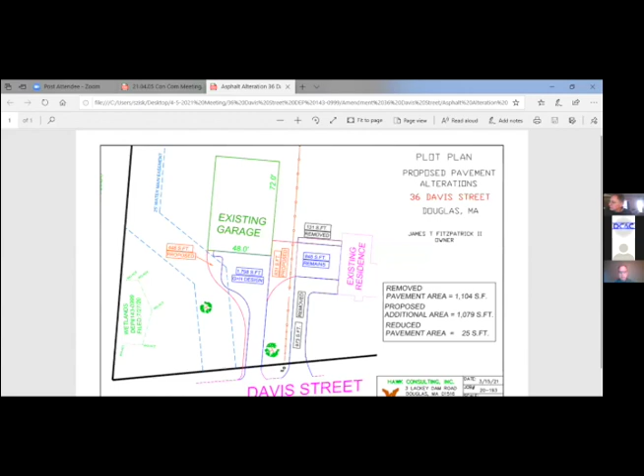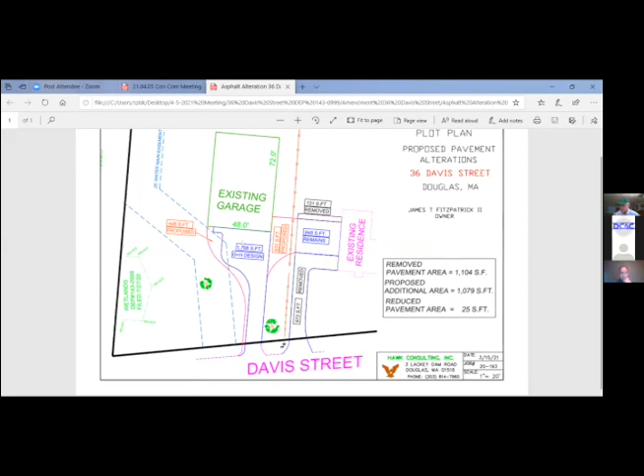Yes, so this is across, Mr. Fitzpatrick can kind of explain. I think if you go down Davis Street, the garage is up. I got some photos I'll show you. I think his existing house is to the right, and I think he wants to connect, he just wants to add a little paving between the two properties. Let me bring up some photos of it.

So this is the existing property here. Is the photos up on the screen? Yes. So Mr. Fitzpatrick, you kind of want to explain what you want to do here? Yeah, right where the white van is, where the tractor is, I'm looking to actually connect the driveway that was approved, that area right there, into the existing driveway to the right of that picture.

And then what I'm looking to do is I'm going to remove a good portion of the existing driveway on this, on the house side, and replace, I'm looking just to replace what I'm removing, just in a different location.

So where that white fence is, that driveway on the left, I'm going to remove that driveway. I was hoping to be able to incorporate all that, but I just installed that driveway like 2 years ago, and now I'm going to rip it up. But in the grand scheme of things, it makes everything flow so much nicer, and that's the reason why I'm asking for this. What's going to replace the driveway that you're ripping out?

Grass, I'm going to extend the lawn. Where you see that, where your pointer is, where the white fence is. Split rail fence? Yeah, yeah, that white fence is going to come out. The stone wall, currently in front of that stone wall all the way up, there's probably about a 2-foot patch of grass existing. So what I'm going to do is remove that driveway.

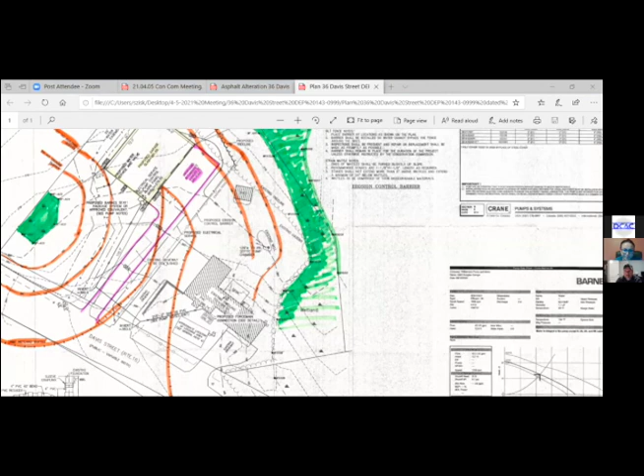Because the plan you're showing was the original plan I submitted—the building is not where you're showing it on that picture, that was the original submittal. Okay, so yeah, the majority is outside the jurisdiction as far as that little slice in there. I wasn't sure, that's why I wanted to make sure. Is this new plan coming up?

Yeah, that's the right plan. Yeah, that's correct, that is the current one. And yeah, you're correct—there's not very much that I'm adding that would fall into our jurisdiction.

And you're actually reducing the proposed on the left side, right? Proposed driveway on the right side is existing. Yeah, on the right, not the left. On the left side, you had proposed—yeah, that was the approved proposed—so you have a little bit over there that you're not doing.

That's correct. At the end of the day, I'm actually 25 square feet less by removing what I'm removing and adding where I'm adding to the approved plan in front of you. So you're not doing the proposed we already approved for 448 square feet, and your proposed 631 square feet is really not even in our jurisdictional area. Maybe probably an eighth is, I would say.

So, I mean, we're moving farther away from that isolated wetland on the front, a little bit farther, 448 square feet less. Right, okay.

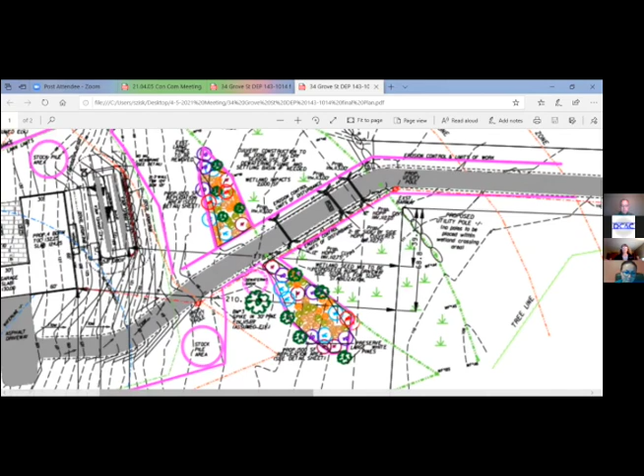Because I think initially they were gonna have like a dirt road or something, and I was concerned about that because in the summer the dirt and sand and stuff flying all over the place. And then Dale had mentioned that he'd just tar it. But then I was like, well what about drainage?

Sorry Steve, go ahead. I believe the entire driveway is designed to be asphalted. Yeah, I had asked that question a few weeks back, a few meetings ago.

And then you can also see how it's pitched with the flow. Yeah, I see the arrows towards the left side, but I don't see anything going down the driveway. Okay.

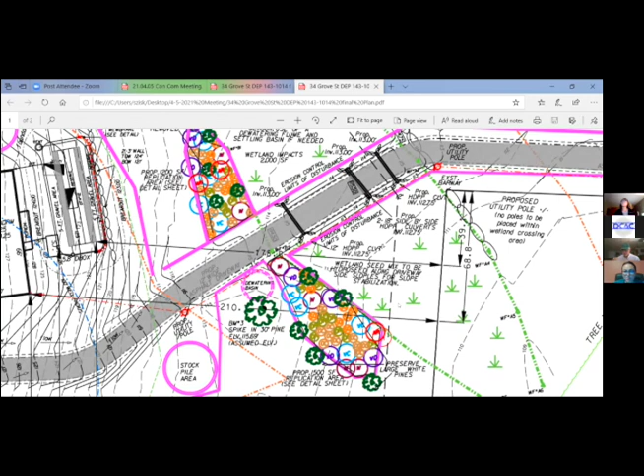Usually the driveway is crowned where it goes over the wetland area. So at the middle pipe, the middle culvert, that's the high point of the driveway, and it goes towards the house and towards the road from that point. Okay, alright, oh, because it's going to be down like a slant. Okay, yes, alright. Sorry, not an engineer.

Okay, we want to keep everyone happy. Well, I'll let it go as much as possible. Right.

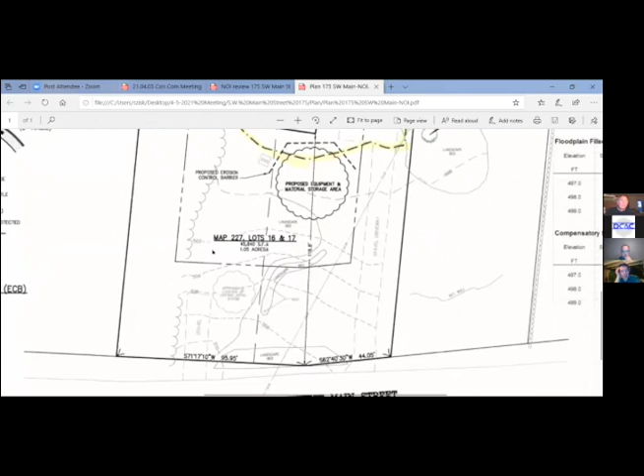Do you have another existing driveway also out there? Yeah, there's one on the left-hand side. I don't think it leads very far into the lot, it's kind of truncated, goes in maybe 40 or 50 feet. If I have a video, you can see it.

So the addition's going to the left. That's right. And that's where the garage would be, we're looking at the area where the garage is. Looks like you might have the second driveway that Steve was talking about, it comes all the way in. Yeah, it might have done some work there since our field survey last year.

This is pretty much where the garage is, and then you'll see the existing deck. I think the proposed deck pretty much goes out to where the existing deck is located.

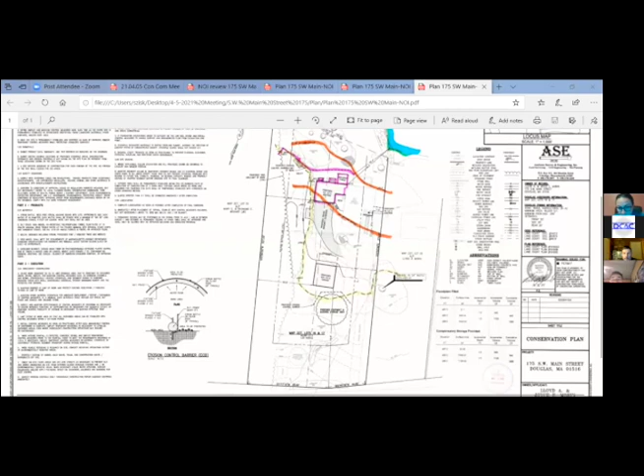Typically, flood storage compensation is not allowed within the flood zone. It almost appears to me from looking at the plan that the flood storage is proposed in that area where they're clearing trees just outside the flood zone. I see it looks like they're changing the grades over there and potentially cutting that area down. That would make sense to me as the flood storage location, because flood storage has to be provided at a foot per foot basis. Typically, cutting down elevations within the flood zone is not allowed for compensation, because the structure is going to be built up above the flood zone.

So you have to cut above the flood zone to compensate for it. You can see where the grades are changing within the area that's proposed to be cleared on the left, to the left of the proposed gravel driveway. That, I think, is where they're proposing the flood compensation. Just a little FYI, that's all. Thank you.

We do have per foot calculations if you need those numbers. Yes, I would like to see those numbers. I'll have to find them. I was reading through the paperwork in preparation for the meeting, and I do remember seeing it, but I didn't make a note of where it was. So we do have a chart on the plan. Oh, okay, that's where it was.

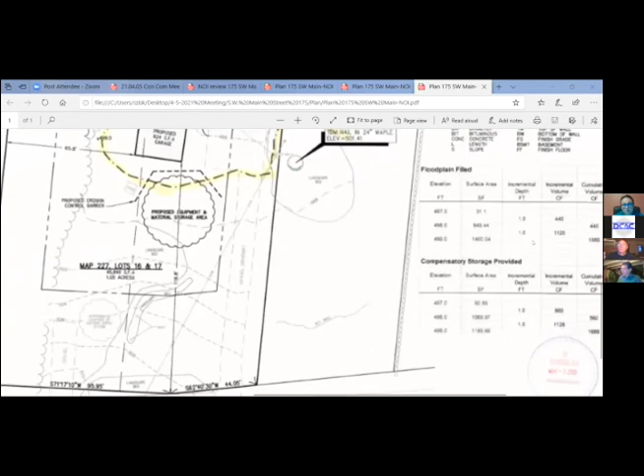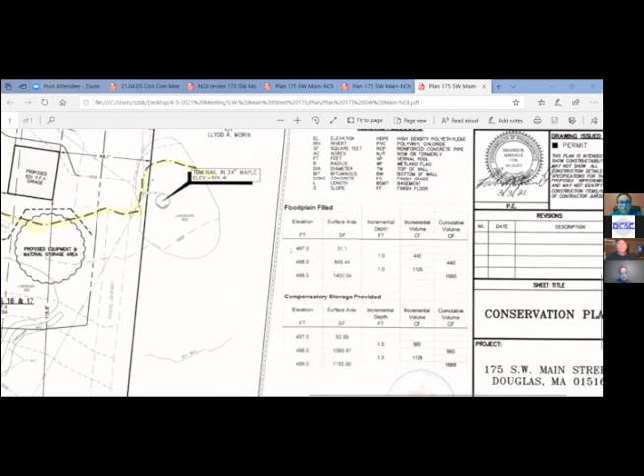So I think we just need to take a look and see what DEP is going to say about that, also, to make sure it's correctly taken care of. All right, well, those are floodplain calculations and compensation calculations, but that doesn't speak to what I asked about in terms of how much total disturbance of the wetland buffer through clearing and compensation work. Yeah, that was your first question, but the second one was, I thought, foot for foot, and location, the incremental depth, like Art was saying, and the location. Yeah, I mean, what's drawn in orange doesn't extend to what looks like to be the limit of the clearing.

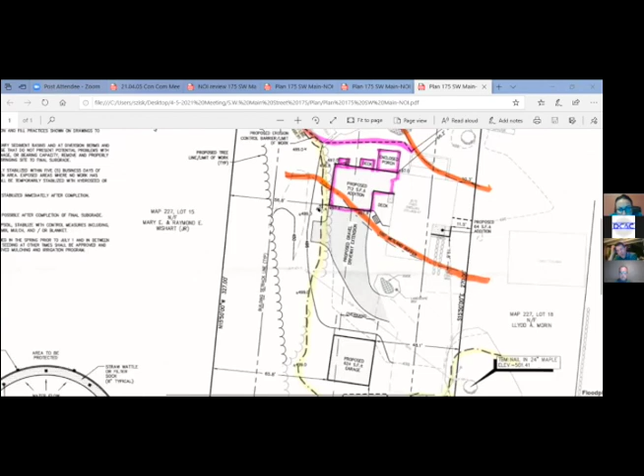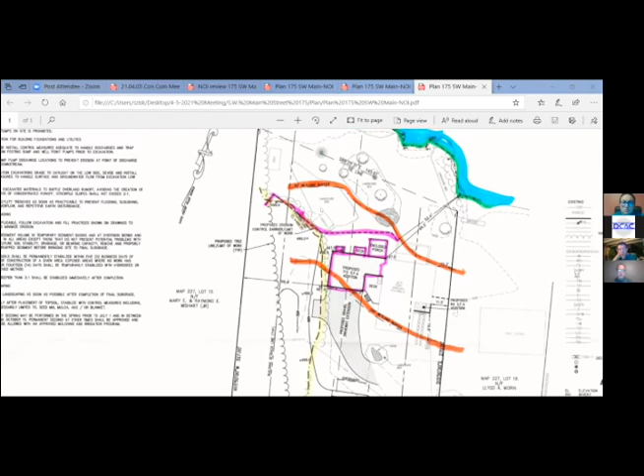So I'm sure Steve has that on his list, that it's not shown. I never got a response from your engineer on some of the basic items that were needed. I think I sent them to Jude. Jude, I'm not sure if you're aware, he had an accident a few weeks ago and he's recovering. Yeah, he had a skiing accident, which is why I'm representing this plan tonight instead of Jude. If you want to send your questions to me, I can work with Jude or with Rich Mainville and get some answers to those questions for you.

Very good. Sorry. Thank you. Sorry about that. Oh, thank you.

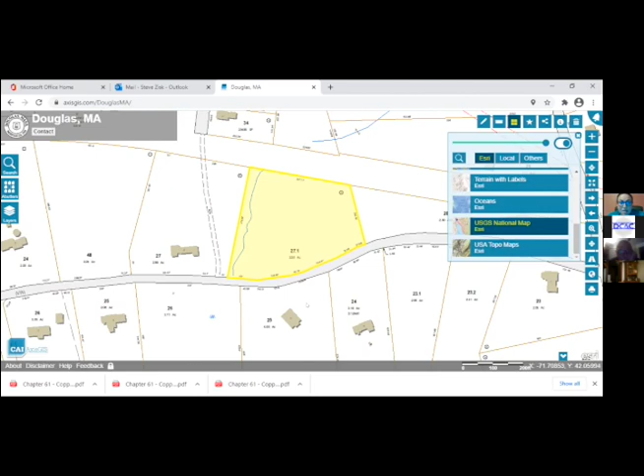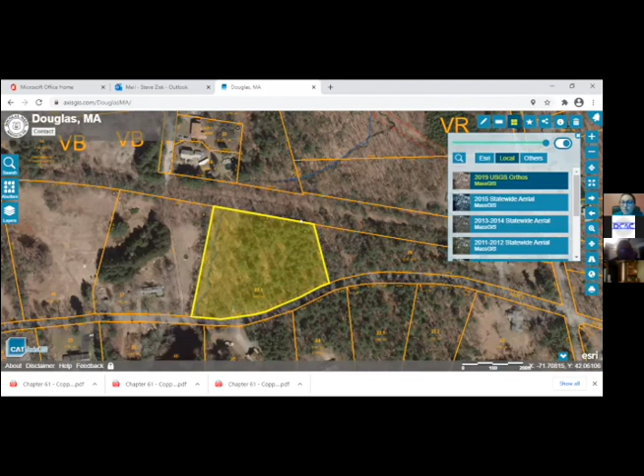The Town of Douglas Conservation Commission will hold a public meeting for Kevin Hart on April 5th, 2021 at 7 PM in the Municipal Center, 29 Depot Street, for work to be done pursuant to the Town of Douglas Wetland Bylaw and the Wetland Protection Act, Mass General Law, Chapter 131, Section 40. The proposed request for determination of applicability work location is 36 Maple Street, Assessors Map 190, lot 27.1, and the applicant is requesting permission to construct a new single-family home and septic system. Public participation will be via virtual means only pursuant to Governor Baker's March 12, 2020 order, suspending certain provisions of the open meeting law, General Law Chapter 30A Section 18, and the governor's March 15, 2020 order, imposing strict limitation on the number of people that may gather in one place. This meeting of the Douglas Conservation Commission will be conducted via remote participation. The public may participate in this meeting via remote participation. A website for the meeting will be provided on the conservation agenda posted on the town's website at least 48 hours prior to the meeting. Copies may be examined electronically by contacting Conservation Commission, 508-476-4000, extension 205, and March 25th.

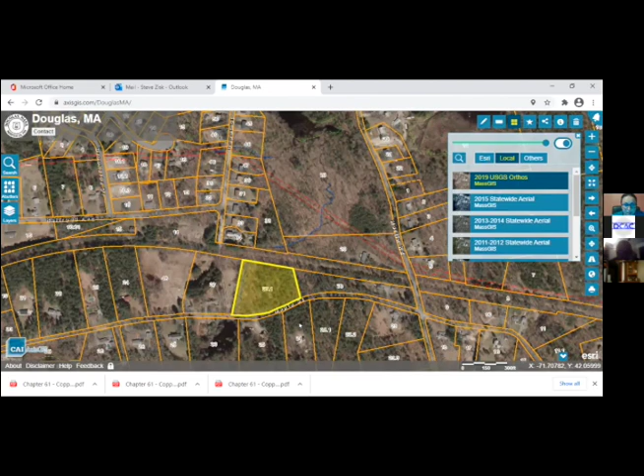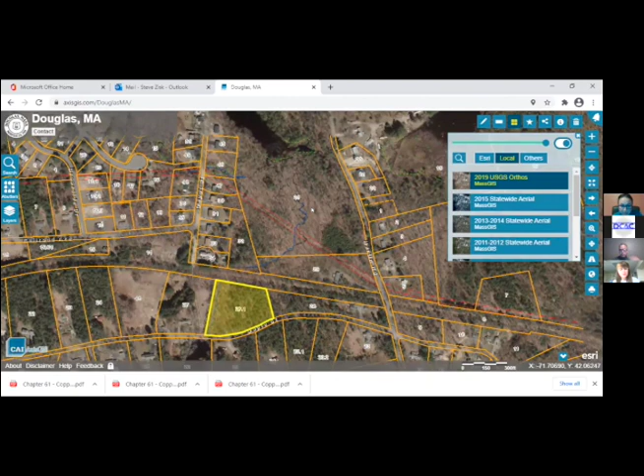So this is a request. Yes, presenting. I think is Margaret Bacon here? Yeah, she's here. Yep, go for it. Okay, do you want me to pull up a copy of the plan? Yeah, I have a copy. Let's see.

I'll just give a brief overview. Basically, I'm requesting hopefully a negative determination for proposed work activities on this lot.

I'm familiar with this area, and it was Southwick Brook that runs along the western property limits. On the USGS map, that shows up as perennial. But years ago, we did an ANRAD requesting a determination of whether that was intermittent or perennial stream. Back in, I believe it was 2004, and I did send Steve the notes, Southwick Brook, just downstream, right there where the arrow is, was determined to be intermittent stream. So with that in mind, we don't believe there's a 200-foot riverfront area, because at one time it was designated as intermittent. That's the reason we filed the RDA, just as a concurrence.

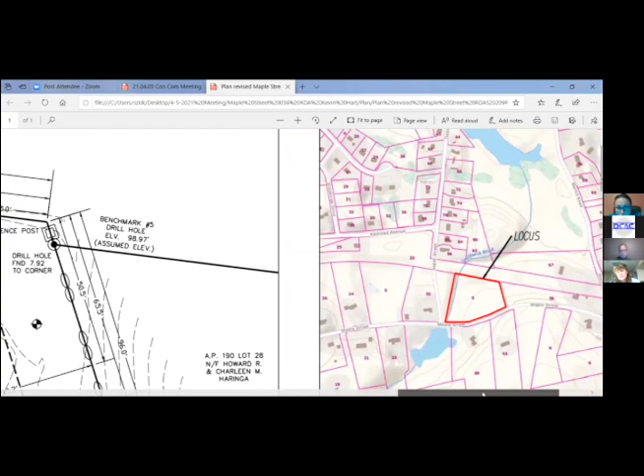It's been 10 years since we had that determination. Also there's some isolated wetlands on the property too by the rail trail, and that there, I didn't realize had a 100-foot buffer zone. Steve brought that to my attention, so I made a revised plan. I put a 100-foot buffer zone on that isolated wetland.

So as you can see, we're asking for two things. One is that the stream is still intermittent, and is not perennial, and we have pictures to document that. And then also that this work as proposed will not impact any wetland resource areas, so we're requesting a negative determination.

So basically, it's two things. The concurrence regarding the stream, Southwick Brook, hasn't changed since the last time we came before the board. And then the plan as designed could fall under a negative determination.

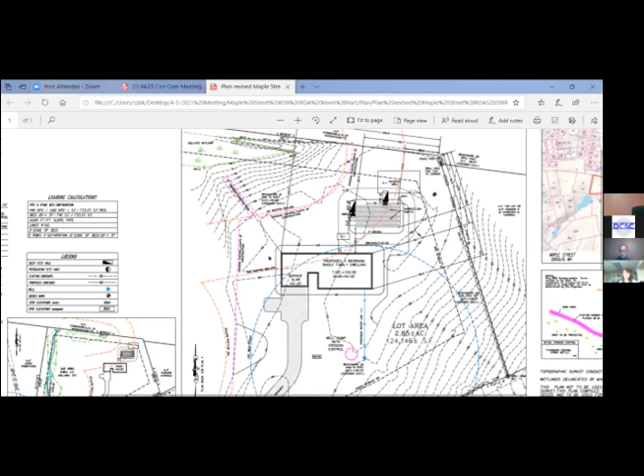When the plan was originally submitted, there were no buffer zones. I think they were just looking to verify that there was no riverfront based on that determination 10 years ago. But now, because of the local bylaw, there is a buffer zone associated with the project. That is another item added from the original plan, that there is work in this buffer zone jurisdiction.

Steve, how is it determined as to whether a brook is a perennial stream or an intermittent stream? Could you give me a quick lesson on that? Because I thought this was a perennial stream.

Right, so let me see if I can bring up the USGS map. I tried to bring it up a couple seconds ago. Just bear with me, one second. I'm going to the town website.

Just quickly, per the regulations, there's a couple things you can do. The first thing is if it shows up on a USGS map, it's perennial unless you can overcome that with a couple other criteria. One is doing the stream stats to see if the watershed area is big enough to support a perennial stream. We did that back in 2004, and it came back as intermittent. Then also taking consecutive pictures throughout the year during a non-drought period, and if that stream bed is dry for so many days in a row, that's also an indicator it's intermittent. That's happened several years in a row.

So you say that in 2004, those pictures were taken and you went before the Conservation Commission and it was determined to be intermittent in 2004. Right, so back then it was 4 consecutive days during a non-drought period at that time.

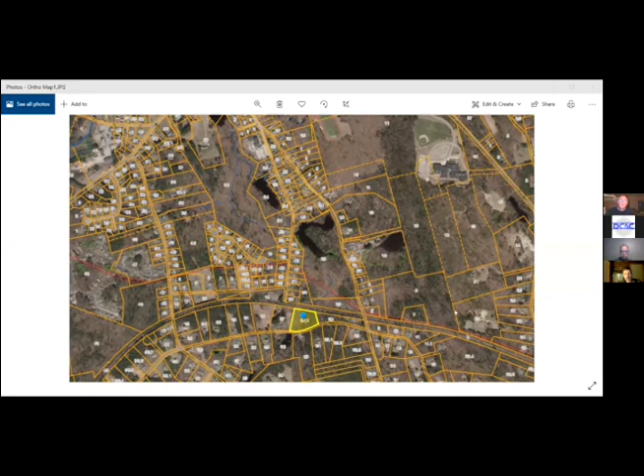Let me bring this up. So once you've gone through that process and determined it's intermittent, it can't go back to being perennial, I assume. That's not true either. The determination is only good for the life of the permit it was granted under. If it was granted in 2004 and not continued or extended, then technically you're making a new determination on the flow status.

Is the ortho map up on the screen? It is, yes. So the determination was for this property here. I'm not sure if it was just for the property it was on and everything above it, because there is a pond here and there's an impediment.

Right. I would hate to say everything north to south of this would be classified as intermittent, because technically this pond and the street, there's a culvert here. That's one of the criteria too—correct me if I'm wrong, Art, it's been 10 years since I looked at it—but if there's a restricted culvert adding to the impediment of stream flow in a perennial stream, that could also qualify it as a determination that it's restricted in its natural flow and might not be intermittent.

That's one of the considerations. Is the property where the determination was granted downstream? Yes, downstream. So I assume the board would have considered the effect of the impoundment when they made that determination in '04. Right, and I'm not sure, there's probably a culvert that goes underneath the old Grand Trunk.

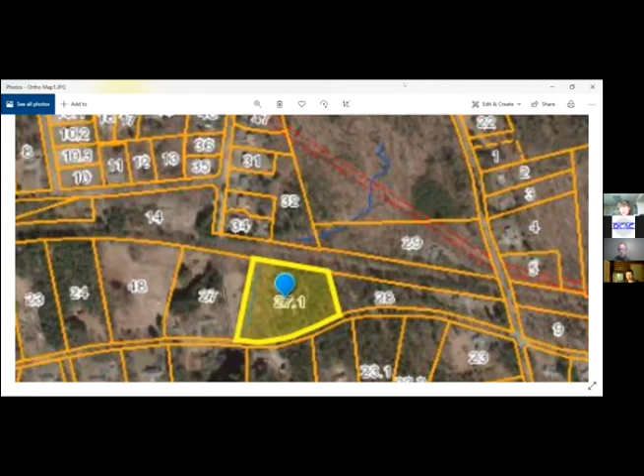So when the plan came in, I think she wanted to clarify if this was still the case, that it was intermittent, and then there were isolated wetlands not shown on here, that actually, even if this was intermittent, the property is still within the jurisdiction of the buffer zone based on the plan. That's true, that's true. And I didn't think that regarding the Douglas bylaw, the isolated wetlands has buffer zones.

I was just thinking of the state regulations, so I didn't put a buffer zone on there. I did show the wetlands, but I didn't show the buffer zone for the bylaw.

I'll bring up, well here's a good map, here's the USGS—the town GIS map isn't working. So here's the perennial. So Mark, to get back to your question, the Wetlands Protection Act is all based on a USGS map. Yes, exactly—if you have a solid blue line on a USGS map, it's perennial. If you have a dashed blue line, it's intermittent.

And with the stream stats, I think stream stats is used to qualify an intermittent stream—like what happened for the one on Davis Street years ago that flows into Wellman Brook. There were studies showing the intermittent stream didn't have the watershed area and flow to qualify the intermittent stream as perennial.

So I think it's a little easier to go from intermittent to perennial because you have the stream stats that back it up. But to go from perennial to intermittent, I think, like Art said, it's only based on finding that it's dry during 4 consecutive days in a 12-month period.

Yeah, and it sounds like it's only for a certain time period. And if that project didn't go forward, then we kind of lose that designation. It sounds like it. So I'm not ready to say personally that this is intermittent. I doubt it affects the project, but I wouldn't want us as a conservation commission at this point to just say it's intermittent, and then have it be perennial again.

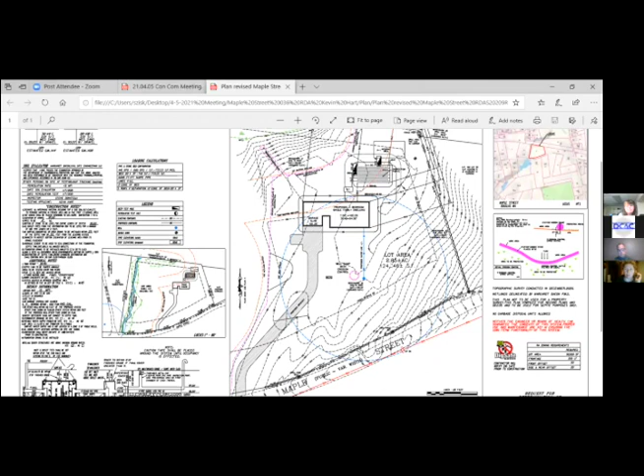This is KG Dudley, and I think we've lost Tracy, so I might be chair right now. Okay, going forward with the presumption that I'm currently chair. I'm looking at this plan, moving it to the upper right corner. It would be a 200-foot riverfront area in that case. Yeah, and you can see the 100-foot buffer zone by the driveway. I don't think I'd be able to stay out of that.

Is the riverfront area measured from the wetland edge, or from the stream bank? It's just from the stream bank. Right, so you have a few more feet there, maybe. You do, but it's not going to be much unless the house is very deep and narrow. It's just going to be a 20 by 20 house. No, I think it's 4 bedrooms, so it's going to be bigger than that.

It's got a garage, and you could fit the driveway, I'm sure, but then you've got the septic. I could probably get the septic and the house outside of the 100-foot buffer zone, it's just the 200-foot riverfront that's the issue. For sure, and I appreciate being outside of the wetland buffer. That makes a difference to me, and certainly making it as far to that side as we can, but I don't think it's going to get you down to just having to do an RDA.

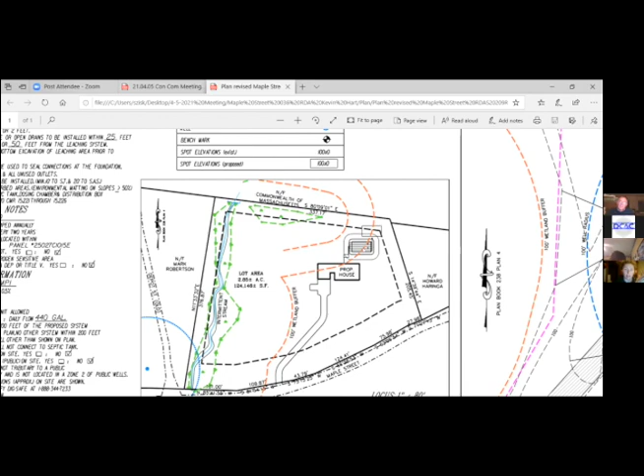All right, is there anything else? Okay. Thank you, board. Thank you, Margaret. Thank you. Thank you. See what else we've got on here.

The next item is a new single family house. It's currently, where is my clock? 8:12. 8:12 p.m. New single family home, notice of intent, lot 5A Chestnut Street, Stephen Swartz.

And there's a folder link. I'm looking for the public hearing notice folder. It has all the public hearing legal notices in it. Oh yes, there is, I have them all in one folder in the G drive. Yep, I believe you. I'm gonna find it. No, it's not there. Yeah, I'll bring it up for you. No, that's the agenda.

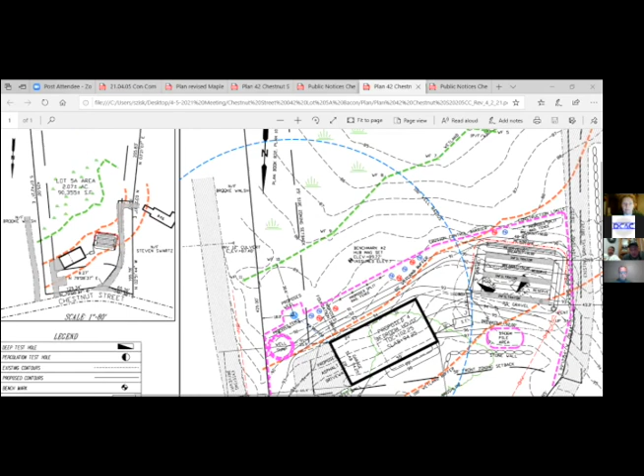I think the video they showed was pretty good, but they don't show the actual culvert and the water going through it. I've been there for 15 years and it's very close to my driveway. I'm concerned - obviously living there, I have a very quiet spot and I enjoy it, but I had to replicate 5-to-1 wetlands back in 2007. Maybe it has made it wetter, I mean, it's soft there. I'm not going to pretend to know all the zoning laws, and being that I had to do certain things too, I just feel he was approved 2004. Maybe a walk could show you differently, that it is wetter than we think.

There are animals that live there, turtles, everything. It's wetlands, for sure. Just for your knowledge, your situation is unique - you have what's called a wetland crossing, and your lot was required to do a replication area to cover that crossing. What you have on your lot is a much greater impact to the resource area than what we're looking at for this lot.

About the well buffer zone, that goes into somebody else's well zone - doesn't that affect it being that close to water? Wells are generally under the jurisdiction of the Board of Health, but from a wetland perspective, septic systems are a Board of Health matter. But for this board, that is why we care about the dimensions from the wetland buffer zone. Okay, so that is something we're taking into consideration for sure.

Well, I don't know much else to say on that. Again, I wish I had more information. I don't know, we just made the meeting here. What else could I think? It's close to my driveway, things like that, but that's not for this meeting - that's something I could take up with the planning board. Do you have any advice on that?

For sure, that was something you could take up with planning board. We're interested in the wetlands, but that being said, thanks for your information on the wetlands. Yes, we would agree that the wetlands is wet. Yeah, I know. Okay, thank you.

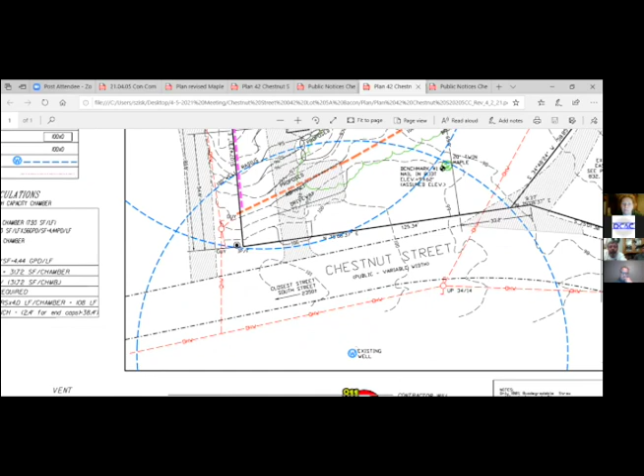Sorry, you can't see that. Oh, I can't do that. Yeah, that's my well, yes. That is the oldest well on the street. This entire street used to be owned by the Parkers years and years ago. I bought this place 26 years ago, and it kind of intersects his little well area.

I don't know a lot about this stuff either, but it's just a horrible place for a house. I'm sorry.

It's been wet. I mean, before Rich came here, that was very wet, from the farm that was to the left of it - that's always been wet. I think the culvert adds to it too. Yeah, the culvert probably adds to it. But no, it was very wet before that.

You're talking about the driveway culvert making it more wet? Oh yeah, the driveway raised up the property and now it's basically on this side, and it's got a culvert running through it now. Definitely, I would say, yeah.

No, and I appreciate it - that was a long time ago, and that's part of the reason Margaret reflagged it. We'll take that into consideration as a board and perhaps contemplate doing a site walk if that's something we want to do. To address your comment about the well overlap, yes, you can see the well radius overlap is drawn out there, so we are aware there is an overlap in that space. There should be enough water available in the space that they wouldn't go dry.

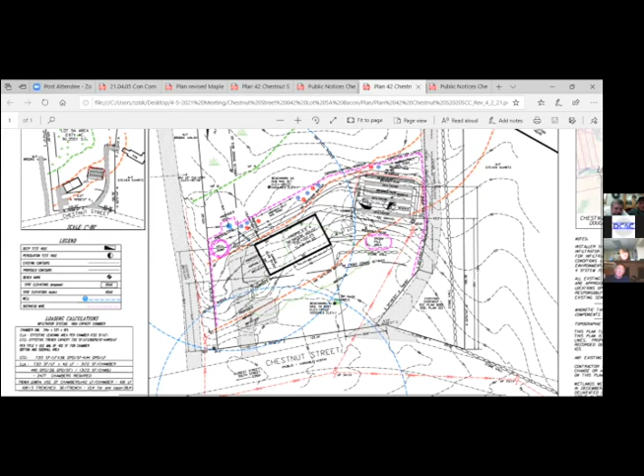Margaret, is there any clearing on the property? I see a light green line that's under the house, is that clearing? It's just a tree line. There are no trees there, it's brush actually, brush line. Okay, all right, thank you. And I appreciate the proposed split rail fence back there too.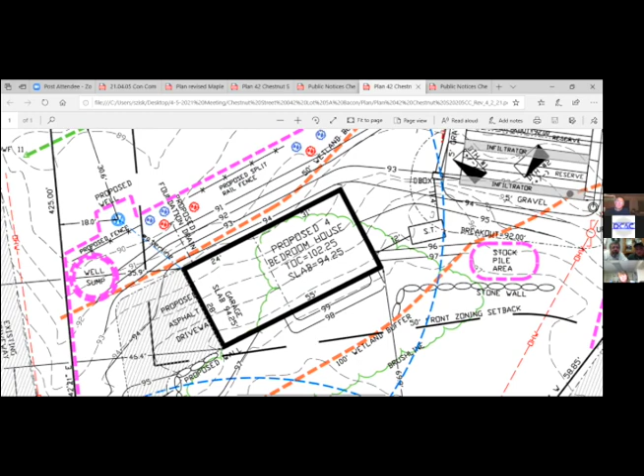Captured all in one meeting. Did you contemplate twisting the house so that front right corner is closer to the street to pull it away from the wetland at the back? Pulling it to the corner of the front right there, try to keep it perpendicular to the grade. You start bucking the grades and you're bringing in more fill, and then with the driveway coming in the side, so now I kind of keep it parallel with the existing contours. Helps on grading because it's a walkout in the back. I start twisting it, then it creates more cut and fill. Right now it's just a walkout straight out in the back.

You see how my proposed grades are tying right into the existing grades, and they're all running in the same direction, I'm not bucking the grade at all. I don't see where there's a walkout at the back, there's nothing that shows that. Well, the slab is at 94.25. See the slab there? And then you see the grade at the rear of the house, 94. Okay, way to show now, I understand.

Walkout in the back. What's the slope up that you have there going towards the split rail fence? That's 3-to-1. Well, that could be 2-to-1 behind the house. No deck, I didn't show a deck, no. I've got that 50-foot buffer. I didn't think a deck was allowed in that 50-foot, correct? You're correct, yeah.

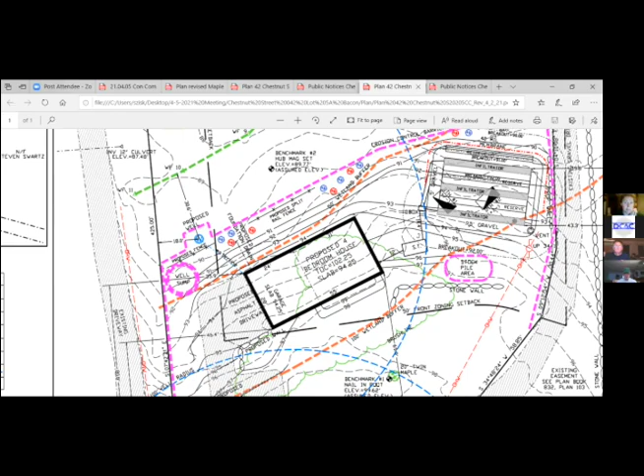I would like to see the site. You wanted to see the site? I don't know if anybody else wants to, but I would like to. Yeah, that makes sense, okay, agree. Is that all right, Margaret? I mean, do you have this flagged? Yep. Okay, I don't have the house staked or the septic staked, but it's not a very big lot. Understood. Is there anything, Mark, that you'd like to see flagged?

That outside of the buffer, do you want to see the corners of the house with the septic done? Yeah, actually, I would. Okay. Margaret, is that something you'd be willing to do? So what do you want me to do, stake in the house and the septic? Yes. When is the site visit?

Whenever you can email me, let me know. So, ready, I'll email the commission. We can't continue you to the new meeting on the 26th because it doesn't officially exist yet. Right, so you would have to go to the May 18th meeting, so you could flag any time between now and the 17th. Okay, when I have it staked, I'll just send Steve an email, okay? Okay, sounds good, thank you.

Then anything else? Nothing else from the board? Anything else from the public? We're gonna continue this if that's okay, but before I have us make that motion, do we have anything else from the public in today's meeting? Okay, if we're sure there's nothing else, because it's a long time between meetings, I want to make sure that we get any of the concerns caught before we go to the next meeting, then I'd entertain a motion to continue.

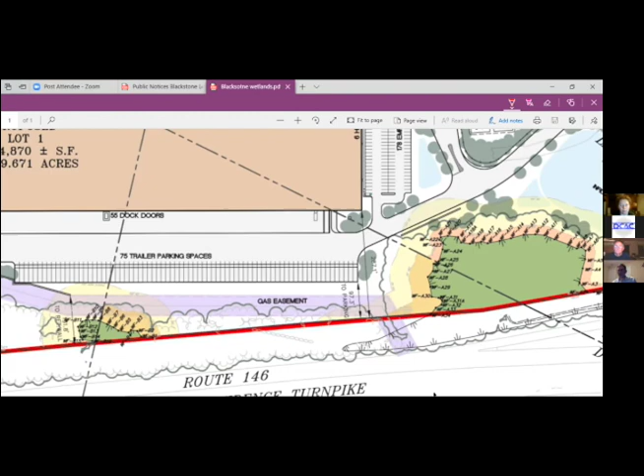The wetland drains towards the right-hand side of the plan in a southerly, southwesterly or southeasterly direction, to an intermittent stream that flows into a culvert that runs underneath Lackey Dam Road and down into eventually Lackey Pond.

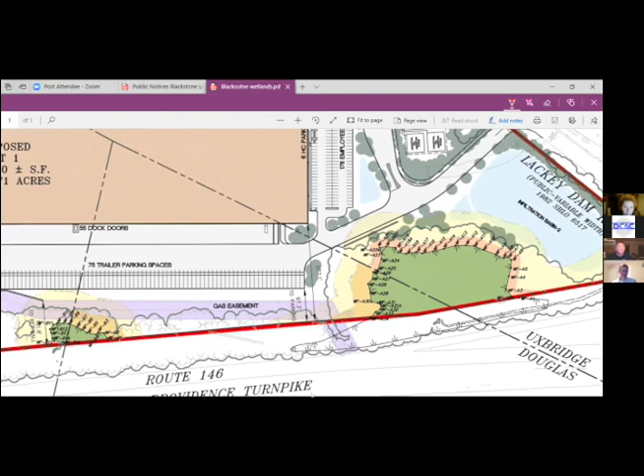The other wetland area is a small isolated wetland with a potential vernal pool designation. That is a small area that does continue off-site a little bit into the Route 146 right-of-way, so that is an isolated wetland with no outlet. That wetland is also bisected by the municipal boundary, this time with Sutton.

There are 3 more wetlands further into the rear of the site, all within Sutton. 2 of those, at the very rear of the property, are isolated wetlands. The larger wetland system in that area may have a potential hydraulic connection to the Route 146 right-of-way. There is also a wetland on the northeastern portion of the site, mostly off the proposed project site, but a stretch is in the site, in Uxbridge.

The proposed improvements at the site consist of a 646,000 plus or minus square foot warehouse distribution facility with associated employee parking in front of the building, located in Uxbridge. Loading docks on both of the longer sides of the building, and trailer parking adjacent to those loading dock areas, with a potential remote trailer parking at the rear of the site in Sutton.

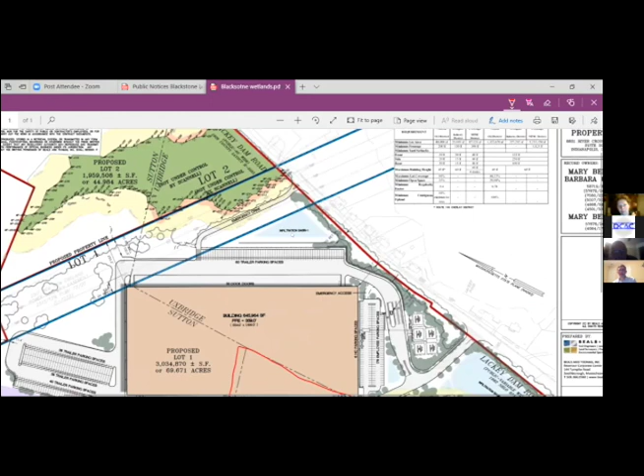The stormwater from the site primarily flows to two main locations: both to the intermittent stream and to a culvert at the intersection of Lackey Dam Road and Route 146, then through the culvert offsite to Lackey Pond and the larger wetland system straddling Lot 1 and Lot 2, into a culvert that flows under Lackey Dam Road, also down into Lackey Pond.

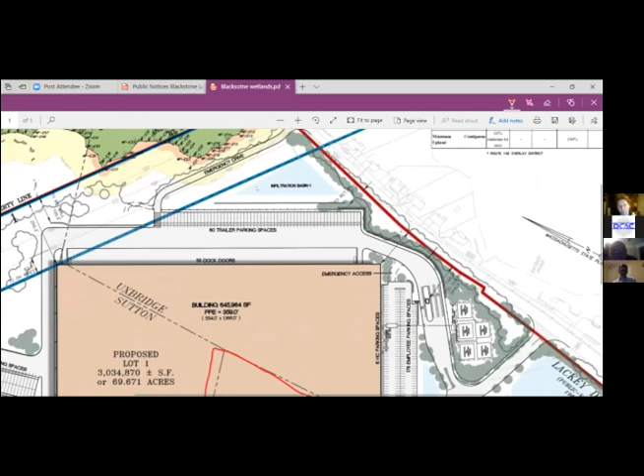There's very little on-site drainage flow to the wetlands that are in Douglas. The isolated wetland has a limited drainage area from on-site. It goes up a little bit and then kind of levels off and goes down at the Tennessee gas pipeline easement, which is shown in purple on this plan.

The A-series wetland does have a little bit of a drainage area to it that is just within the Douglas side of things - right down in there, to the left of that, where the A27, 28, 29 flags are. There is a contributing area to that wetland down in that area, and again, that also has a contributing area from the Route 146 right-of-way.

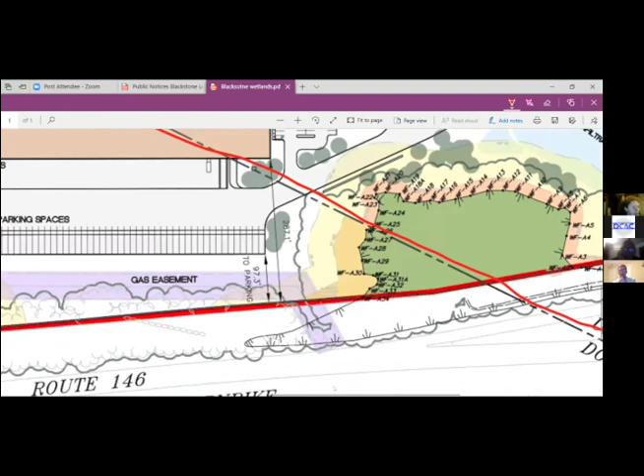So on this plan we've shown the 50-foot no-disturb area in the orange peach color, and then the 100-foot buffer zone of the 50 to 100 in the yellow color. There's not a lot of proposed work within the Douglas buffer zone, within the 100-foot buffer zone. There's a little bit of off-grading within the 100-foot, both associated with the A-series wetlands as well as the B-series isolated wetlands.

So if you want, I can pull up a plan that shows grading so you can see the limits of the grading. There's no pavement, no structures within any of the buffer zones within Douglas, but there is some off-grading areas, so temporary impacts to the outer 25-foot of the buffer zone.

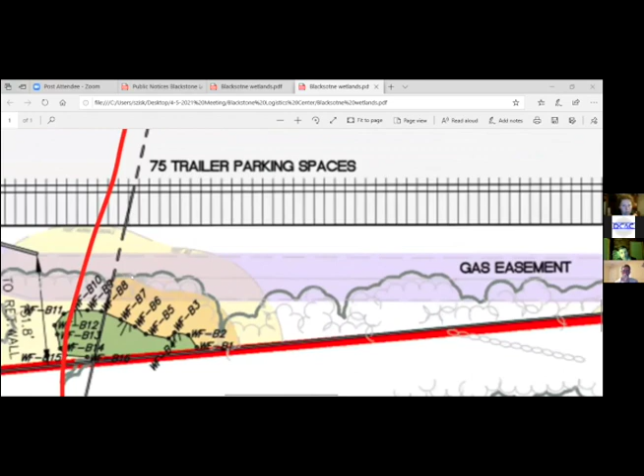This was an earth removal site, and the existing tree line is basically the limit of the earth removal operation, so all of their proposed work is outside the tree line in the formerly excavated area - again, 50-foot buffer for the B-series, minimum setback. And then the A-series - they're outside of the 100-foot buffer in Douglas for their limit of work.

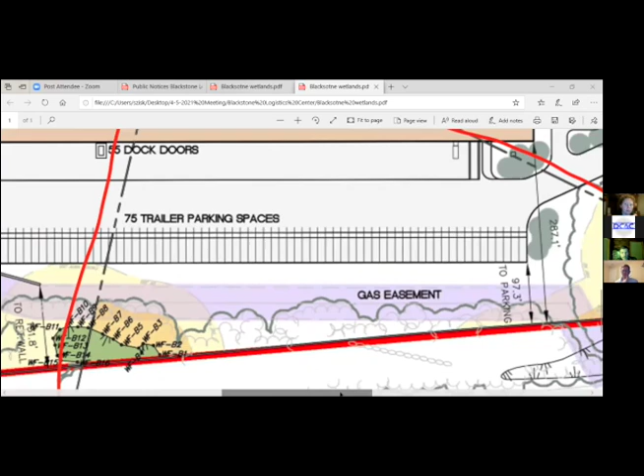So really there aren't any significant issues pertaining to resource areas or resource area protection in Douglas, in my opinion. There really isn't that much going on in Douglas wetland-wise, and they've minimized the impact. So that's about it from my perspective.

I think they still have some work in the other towns, but I'm not aware that they've even filed the NOIs in the other towns, so I assume we'll deal with that when we get to it. Thank you. Thank you, Art.

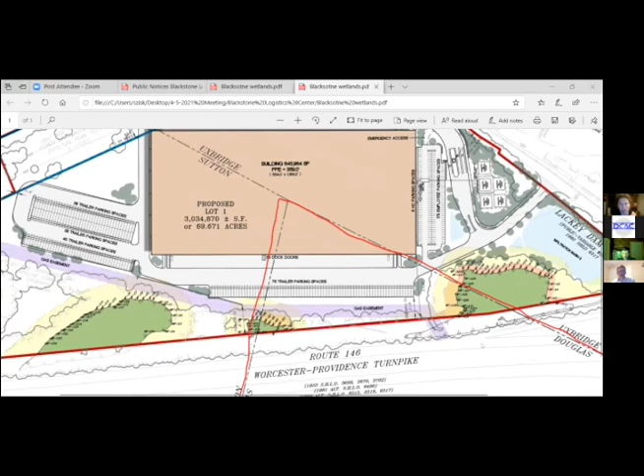And then my other follow-up would be the parking spaces for the trailers, that whole paved area. Is that curbed so that it guides the runoff towards a particular basin? It is curbed, yes. Everything is collected in deep sump hooded catch basins and directed down to one of the two infiltration basins that are proposed. So the infiltration basins would catch things like gravel and salt spread on the parking spaces? Yeah, it would be treated first and then directed to the infiltration basins, yes.

Okay, that addresses the questions I had. Board, anything else? I have a question. Yep, Mark.

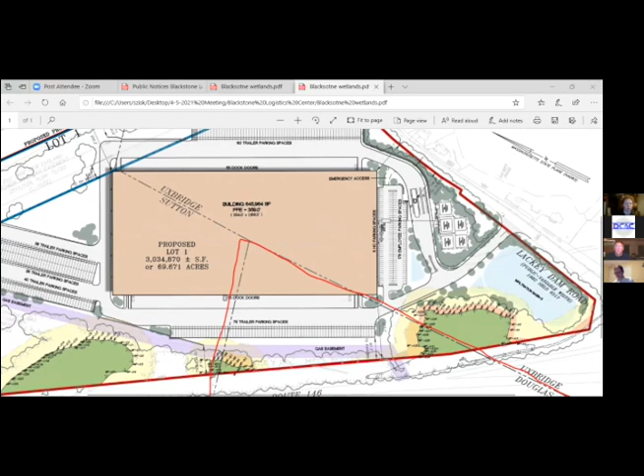This is a large project and there's a lot of impervious surface, so how are you handling the water off of these impervious surfaces, and how will you protect the wetlands? Will they still get any water from the site? As I noted, the vast majority of the wetlands don't have any tributary overland flow from existing conditions to the wetlands from the developed portion of the site. There's berms that come up and then come back down, and the Tennessee Gas Pipeline is almost a high point.

The A series wetlands does have some tributary flow to it. As an update, we've had a few joint planning board meetings between Douglas, Uxbridge, and Sutton, and they have retained a peer review consultant, Graves Engineering, who reviewed that and have a comment on it. So we've done a separate drainage area analysis of the flow to that A series wetland, to show the impacts, because we are cutting off a little bit of flow, but not a lot, especially considering the amount of offsite flow that comes to that wetland. There's a pretty good amount of the Route 146 right of way that flows down into that wetland area.

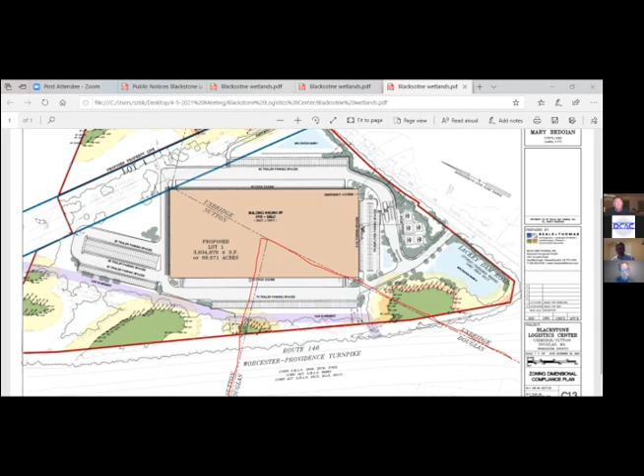Coming all the way back up towards the gas easement, up in there. So the other side of the gas easement? The other side of the gas easement - Sutton has a zoning requirement for open space, and you cannot include land within easements because you don't have full control over that land to create such an open space designation. So it's that area, as well as some of the triangular piece between the National Grid easement and the trailer parking.

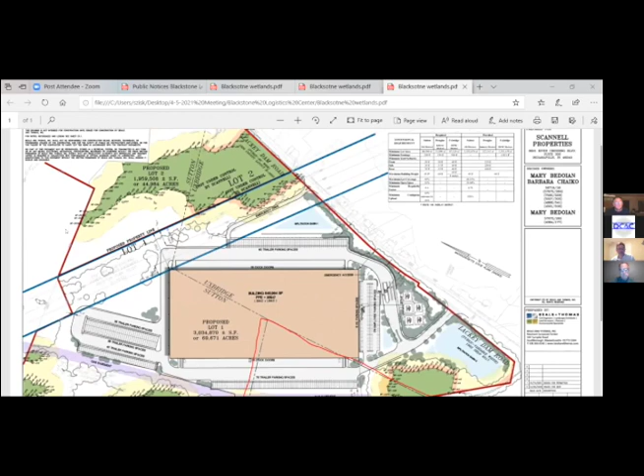Does it continue to that B series wetlands that's on the edge of the line in Douglas? I believe it does, yes, continue all the way down to the B series wetlands.

And as Mr. Allen noted, we are keeping all the trees down in there in Douglas as you come down. They start to come up into the gas easement, especially the canopy overhangs that gas easement, so none of those trees are being altered as part of the proposed project. You're not crossing, so you're staying 50 feet from the gas easement - you're not crossing the gas easement at all. There is some grading within the gas easement.

We've coordinated with the gas company because we're proposing a swale. You're not crossing the line - not crossing where the middle of the easement, where the actual gas pipeline is, but there is some grading within the easement itself. The edge furthest from Route 146, there is some grading within that section of the gas pipeline, but that's all cleared under current conditions.

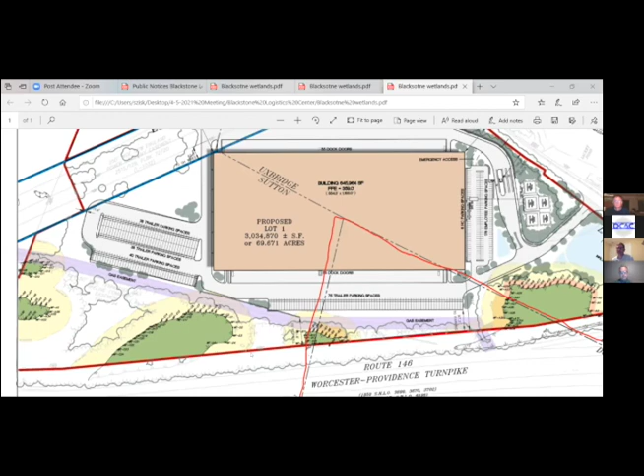Can I assume there's a detail for the infiltration basins within the documents? Yes, on the detail sheets. What is the floor of that - is it going to be a planted floor or sand? I believe it's called out to be a sandy based loam material, so that you can have some stabilization on the bottom. It's not intended to be strictly a sand or gravel bottom, but we can't put rich topsoil down and still keep the infiltration rates.

How far did the gravel pit get to groundwater? Do you know how far above the groundwater they stayed? For the infiltration basins, or just across the site? Yeah, it sort of varies - the grades on the site for a fair amount of the site are up in the 360 range, and most of the test pits that were done didn't hit groundwater, going down 10 or 15 feet.

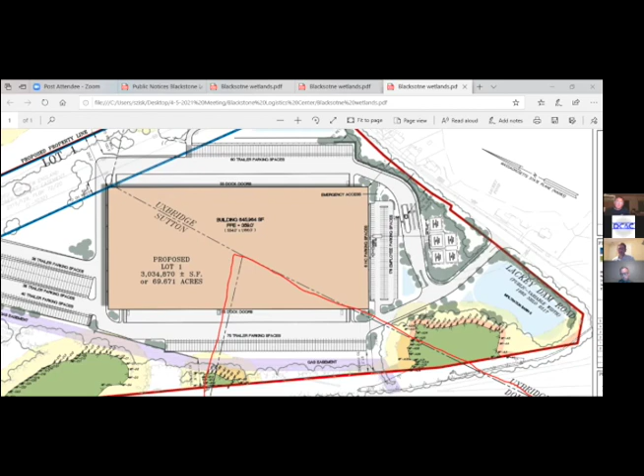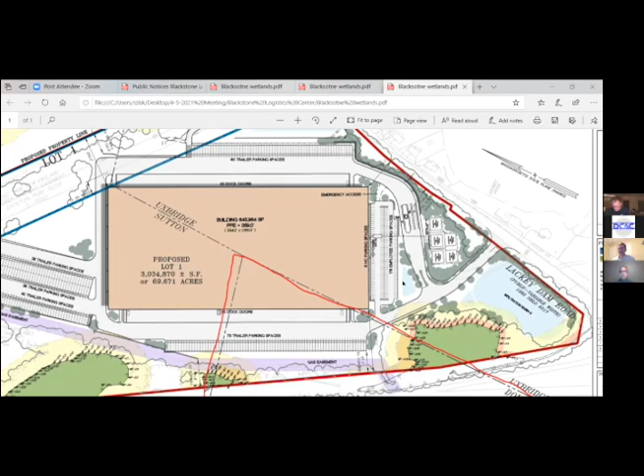Hi, everybody. Hey, welcome back. Thank you, we're still here, talking about the logistics center. I figured - I came on around 9:03, I think it was.

Okay, great, yeah, pretty familiar with the site. Fantastic, I'm just trying to decide if we have everything here or if we needed something else. I don't know if we're...

Well, I think we need stormwater management - well, yeah, I think you need the other towns, you need one cohesive plan from planning and conservation in all three towns. So even though Douglas has the most minimum amount of work, and we probably would be ready to approve our sections, we would want to continue any meeting until everyone's working off the same approved plans. Right, so from Art's comment letter, have those plan changes been addressed in the revised NOI?

We talked through those. But I mean, that being said, to the point of Steve, the cohesive plan is important, and I believe the stormwater management stuff is still working through the channels.

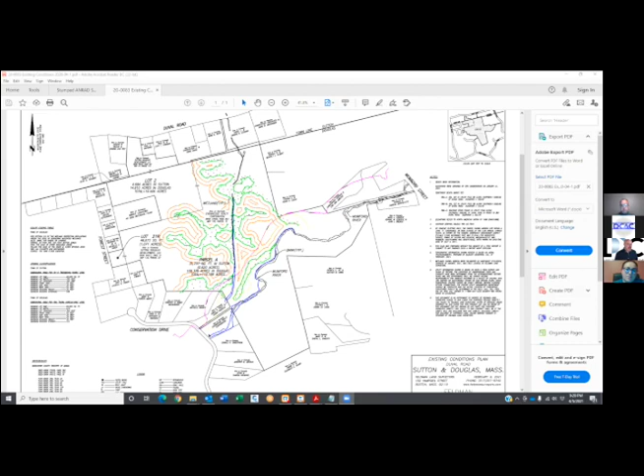So Wayne, because you have control of the screen, you have to use your pointer to go over what he's talking about. Okay, thank you, I was hoping to take a nap. Do we want to just switch that back to you, Steve? Sure, I would love that. Thank you, everyone involved. Now you can nap. There's no naps in Conservation Commission.

Even though there are wetland resource areas south of the Mumford River tributary, what the ANRAD is covering is just all those wetland resource areas to the north of that tributary, including the banks of that tributary itself. The banks were flagged from bank number 1 and end up at the bend to the northeast at bank 45. That's important because it establishes the 200-foot riverfront area from the banks of that perennial stream.

There's also an excavated channel, an intermittent stream on the property, which basically divides the property into an eastern and western section. It's a rather unusual feature - not really sure what the purpose of that channel was. It starts fairly close to that perennial stream, near a stone structure. I had a photo in the wetland report I submitted to the commission. It's probably 4 to 6 feet deep and sometimes 10 to 12 feet in width, running a pretty straight shot through the property all the way out to Duval Road, then eventually discharges into Stevens Pond in Sutton.